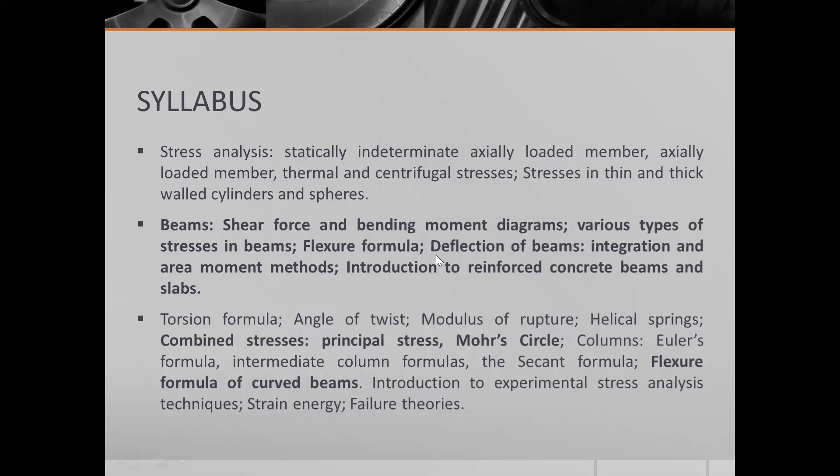So this is one sort of objectives that we are going to have for this course. We are going to be introduced to different types of calculations for different materials.

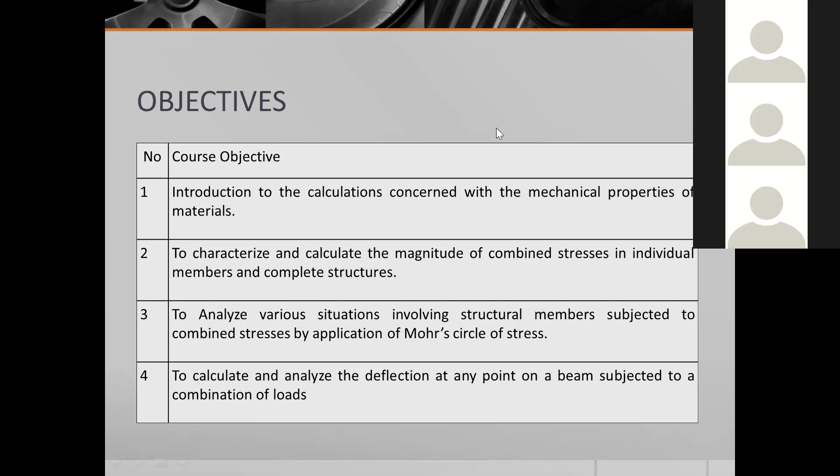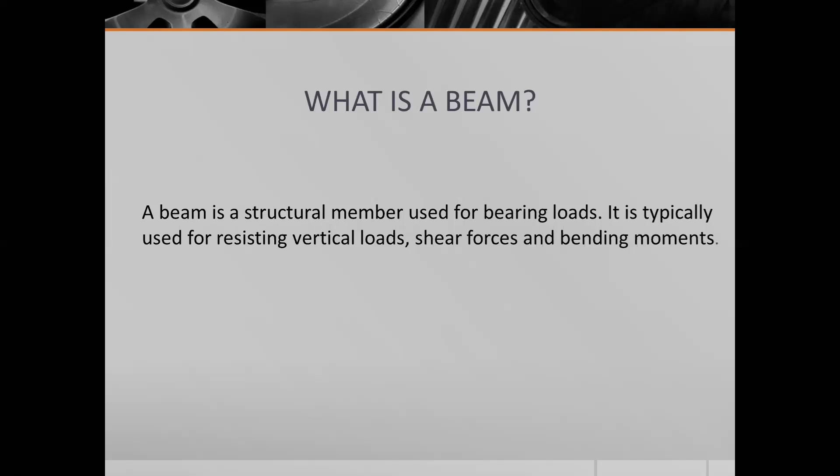So a structural member which is going to bear load can be called a beam, and typically they are used for resisting vertical loads, shear forces, and bending moments. Okay. Some classification of beam is shown here. I know it is a repetition for the military officers, but this will be new for the other students. So I'm going to repeat this one. Otherwise, going forward, you're not going to understand.

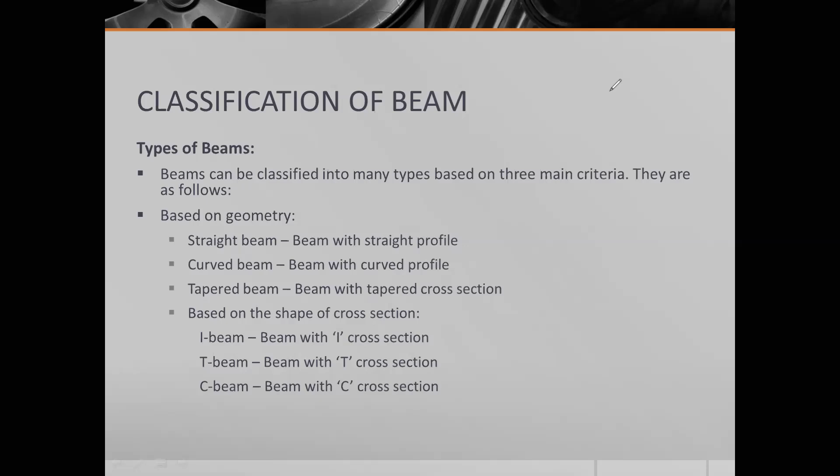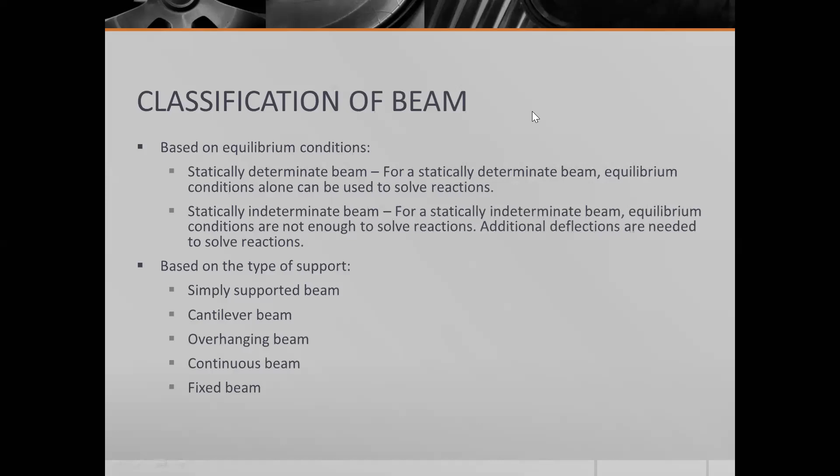Simply supported beam. So beams, when they are supported by two reaction forces at the two ends, will be called simply supported beams. Remember, you have the support to hold on this beam.

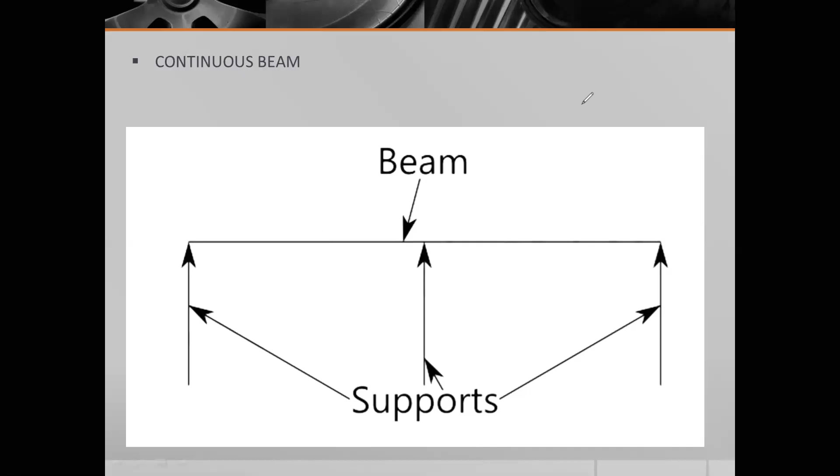So the next one is fixed beam. Fixed beam means both sides will have a fixed support. On both sides of the beam there will be two fixed supports.

Excuse me, sir. Sometimes your voice is not fully clear, sir. It's audible, sir, but not clear. Sir, the voice becomes slow. Is it clear now? Sir, now clear. Okay, I have just unplugged and plugged again my audio piece. Now is it clear? Yes, sir.

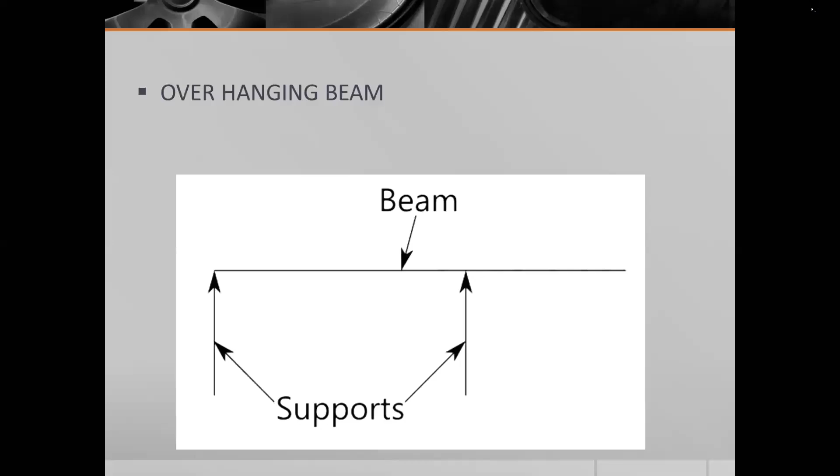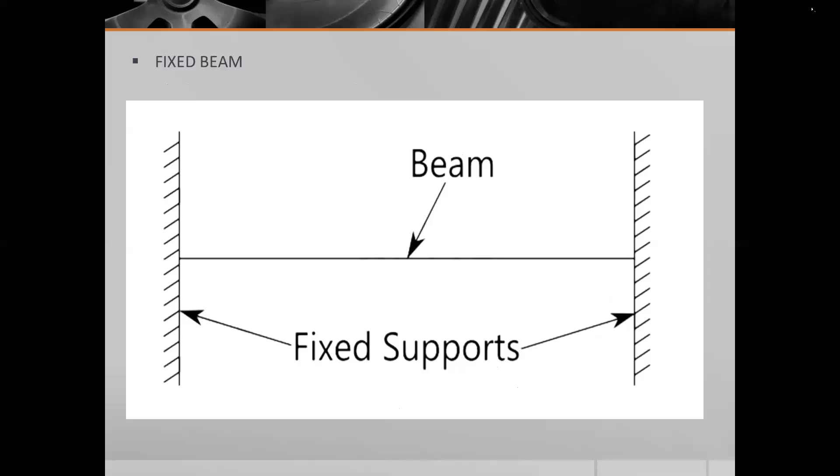Okay, so fixed beam is when your beam is having two fixed supports at both ends. This is called fixed beam. So if we see the types of beams according to the support, we have simply supported beam, cantilever beam, overhanging, continuous, and then fixed beam. So we are accustomed with different types of beams, right? So now I want to show you some small calculations.

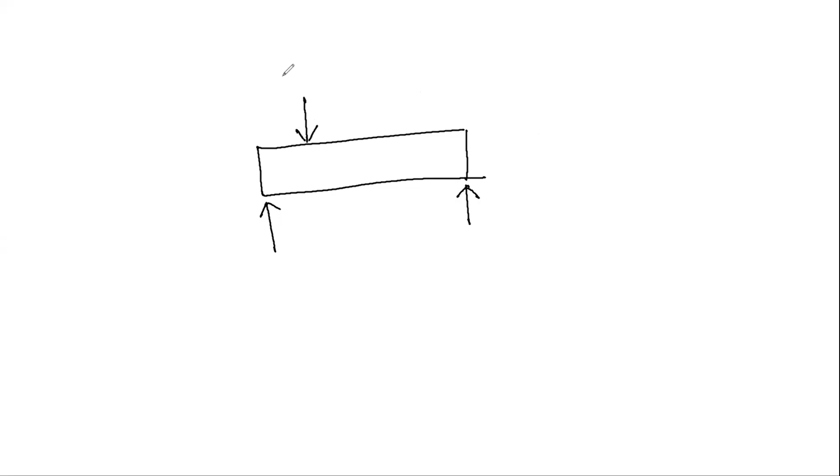So we have a beam. This is how we show beams, right? So we take two reactions. So this one is which beam? What is this type? Straight beam, sir. And the type of support? Simple support. Simply supported beam, right? So simply supported beam, suppose there is a force here, F1, and there is another force here, F2.

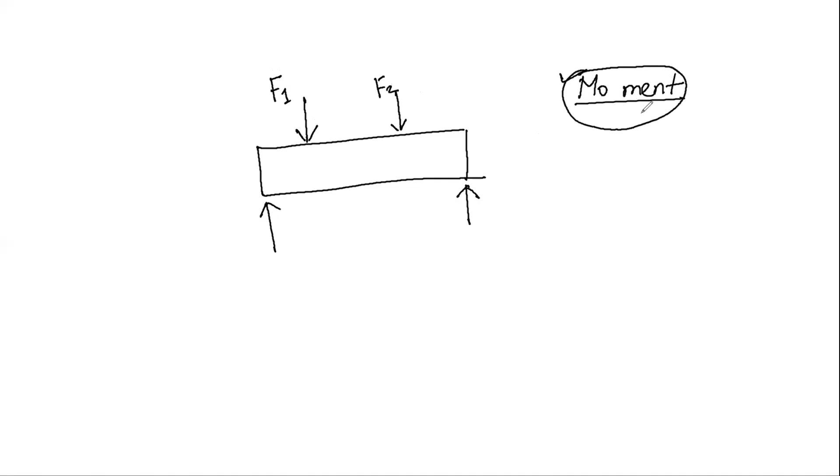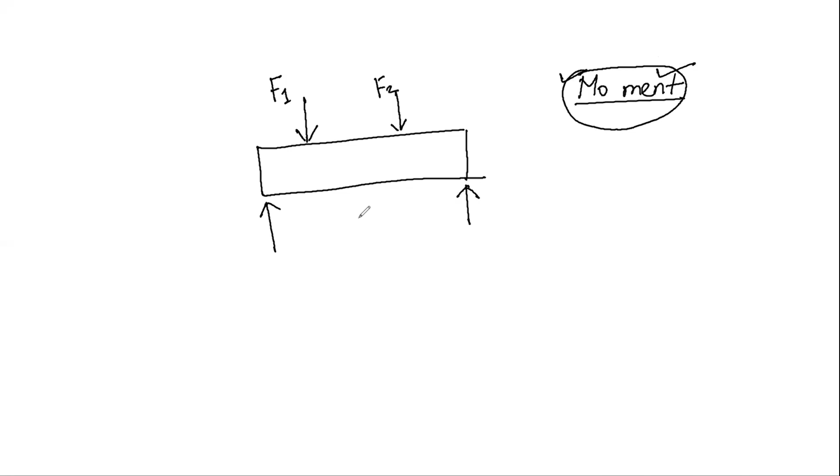What we're going to discuss is how to find out moment. So what is moment? Other than military officers, the rest of you answer, they did this in the last class. What is moment? Any idea? Multiplication of force and arm distance. Tendency to rotate at a fixed axis or point.

Okay, good. Moment is when you apply any force on any object, it tries to rotate the whole object about an axis or a point. So how are we going to show the moments? Moment is shown as applied force into the distance from the point or axis. So this is moment.

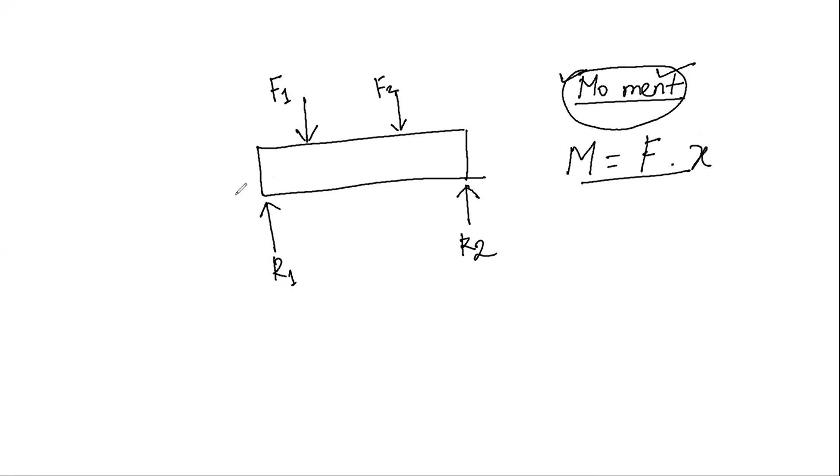So now A and B are there, and we want to know the moments this combination is giving. We are going to find out moment at A or moment at B. Suppose this one is X distance, this one has Y distance, and this one has Z distance. Clear? So you have your forces, you have your distances. Now you need to find out the moment for point A and point B.

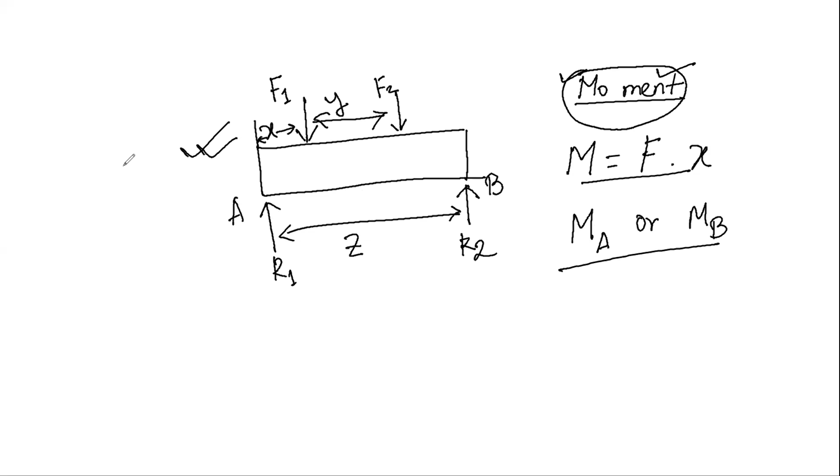Suppose we are going to find out MA. Our equation is going to be force into distance, and we'll take the summation of the whole thing. So we have forces F1, F2, R2 and R1. For point A, we see a force R1 acting at A, right? If R1 is the force, what is the distance from A to A? 0, sir. So this will be 0.

Positive and negative we'll come to later. F1, what is the distance from F1 to A? X. Then what is the distance from F2 to A? X plus Y, right? Good. And then we have R2, what is its distance? Z. So this is our Fx for the whole beam. Now whether these are added or subtracted, that we are going to find out. If you see the direction of force F1, it's downward. What is the distance from A to F2?

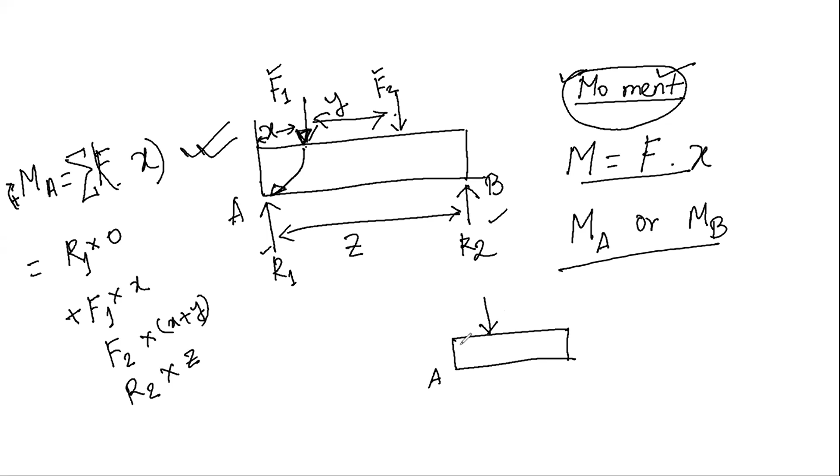Okay, so this is your load, right? And this is your point. So loaded direction কোন দিকে? নিচের দিকে, right?

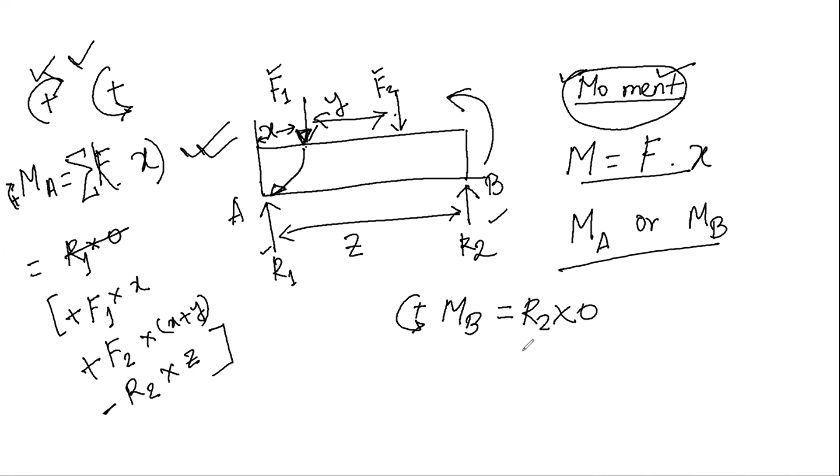Then F2 তে একটা আসবে, F1 এ একটা আসবে, আর R1 একটা আসবে। বলো কি হবে দূরত্ব? F2 into Z minus (X plus Y), sir. Z minus (X plus Y), right? F1 into Z minus X. Z minus X, sir. Yes. R1 into Z.

পজিটিভ নেগেটিভ বলো। F1 and F2 is positive, sir. R1 negative. This is trying to do this, and we have taken this one as positive, so this is positive, this is positive, this is negative. Clear? আগের মতো ডিরেকশন যদি নিতাম তাহলে কিন্তু এটা আবার উল্টা হয়ে যেত, নেগেটিভ নেগেটিভ পজিটিভ, রাইট? Yes, sir.

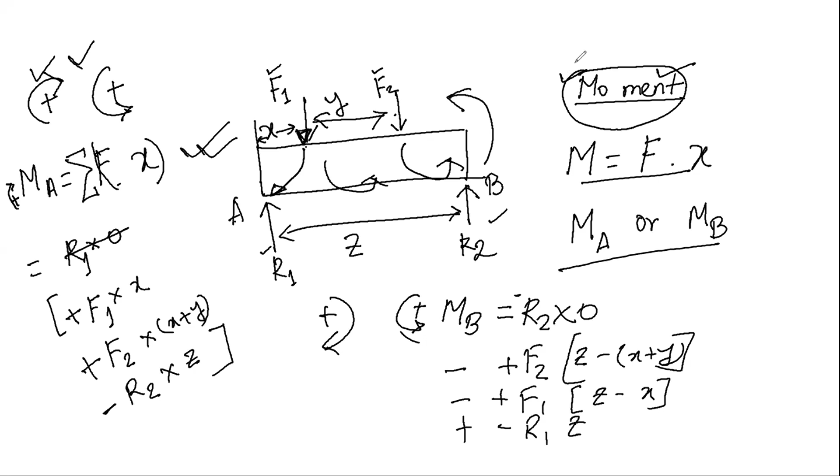So I guess there will be no problem on finding out the moments. Okay, so যদি আমরা এখন মোমেন্ট বের করতেই পারি, আর একটা ছোট জিনিস আমরা শিখে ফেলি আজকে। Sir, ক্লাস শেষ করে দেন। Give me another 2 minutes, just another thing.

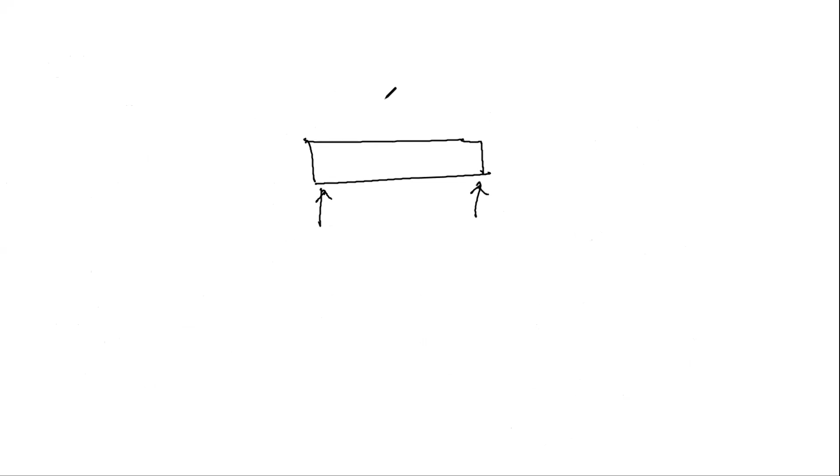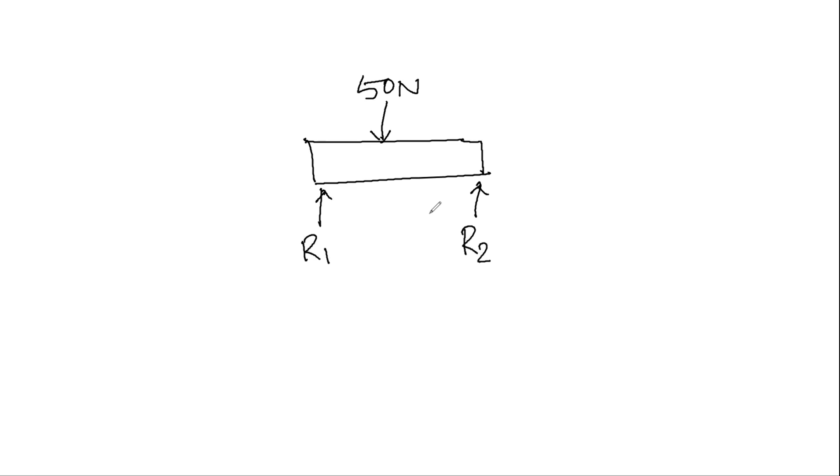So if this is a beam, this is your reaction force. Okay, আর মাঝ বরাবর একটা ফোর্স কাজ করতেছে, সাপোজ 50 নিউটন। This is given R1 and this is given R2. You have to find out the reaction. R1 এবং R2 এর মান বের করো। Okay, so R1 plus R2 will be equals to 50.

Then এখান থেকে তোমরা রিঅ্যাকশনের একটা ইকুয়েশন পাবা। Then you need to find out moment at A, moment at B. যখন মোমেন্ট বের করতে যাবা তখন আইদার R1 অথবা R2 বের হয়ে আসবে, তখন এই ইকুয়েশনে ফেলাই দিলে বাকিটাও বের হয়ে আসবে। Yes, sir. Okay, we'll discuss it in the next class.